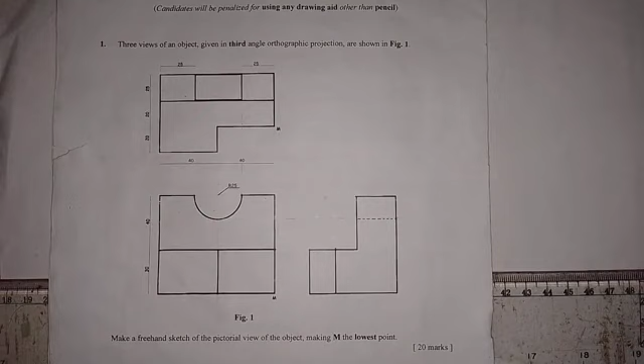Three views of an object given in third angle orthographic projection are shown in figure 1. So these are the views, as we have been told that these views are given in third angle projection. It means that this is the plan or top view, and this is the front elevation, while this is the end elevation. So we want to put this part together to obtain its isometric view. That is what we want to do.

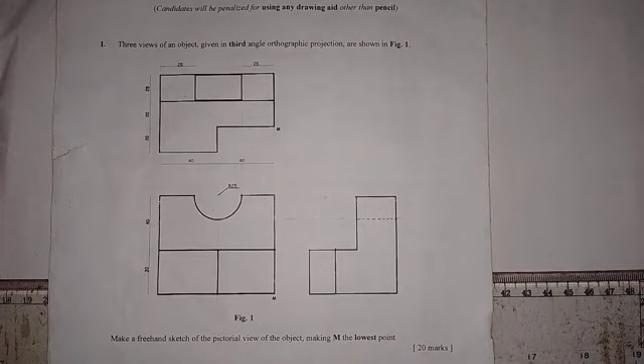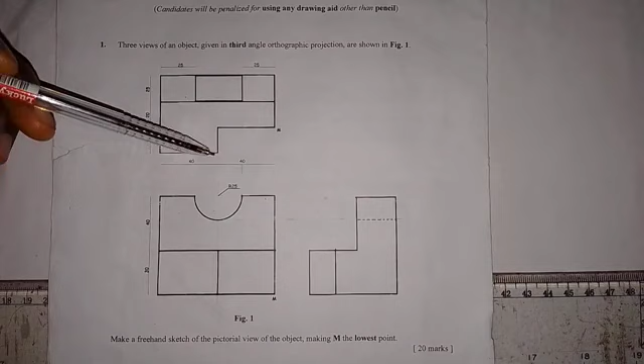Okay, let me talk about the dimensions on the object as we have here in the plan. For this square, we have length from here to here to be 25, and from here to here is also 25, and distance from here to here is 25. From here to here is 20, while from here to here also is 20, and distance from here to here is 40, from here to here is also 40. That is for the plan.

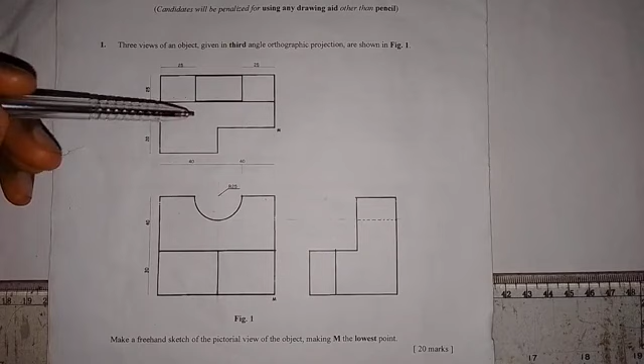Then coming to the front elevation, we have that distance from here to here is 40 millimeters, from here to here is 30, and the radius of this semicircle is 25. Those are the dimensions that we have here. Another thing is that we are asked to place this particular point M as the lowest point. So we want to put this part together to obtain its isometric view. Let's go.

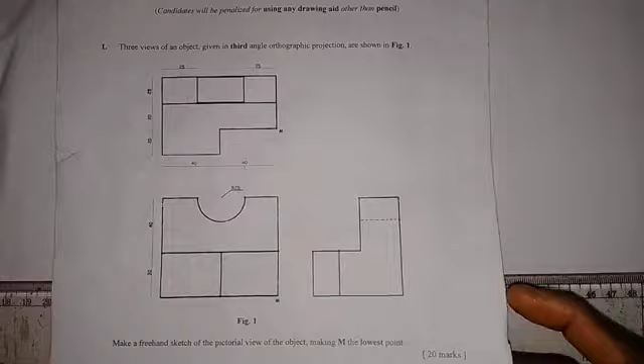Since point M is the lowest point, we need to draw a horizontal line. Then with our 30-degree set square, we draw a line in this direction, and then we draw a line in this direction, like this. Now this is point M, the lowest point, so it's very important that we indicate it.

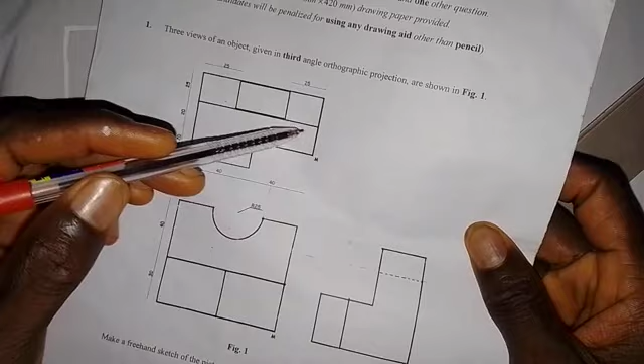The next thing we are going to do is construct this shape. I will just bring this out in the plan. We are going to see how I'm going to do it. For point M to be here, distance from here to here is 40. So I will take a measurement of 40 millimeters from here. So this is 40.

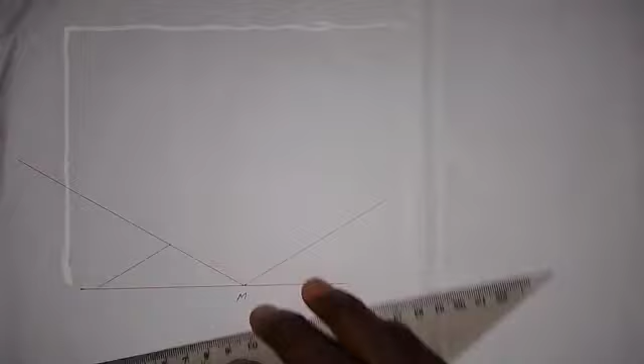So I'm going to draw a line from this point in this direction like this. Then from this point, we have that distance from here to here is 20 millimeters. So I will come onto this line and take a measurement of 20 millimeters. So this is 20 millimeters. I'm going to draw a line from this point in this direction,

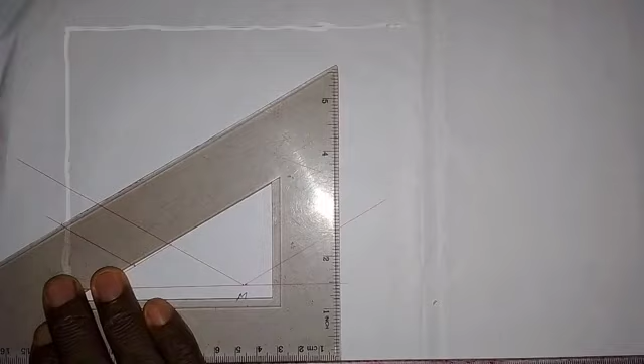like this. Also, we have that distance from here to here is 40 millimeters, so I will also take a measurement of 40 millimeters here. So this is 40. I'm going to draw this line in this direction.

The next thing I'm going to do: from here to here is 20, from here to here is 25, so that is 45 millimeters. So I will come onto this line and take a measurement of 45 millimeters. First I take 20, then I will add 25 to it, so this is it. I'm going to draw a line from this point. Though I don't need this line, I'll just draw it. Then I will also draw a line from this point here.

Okay, now looking at what we have done, I'm going to draw a vertical line at this point. Also at this point I will draw a vertical line, and at this point here I will draw a vertical line. At this point also I will draw a vertical line. Here also, and at this point I will draw a vertical line like this.

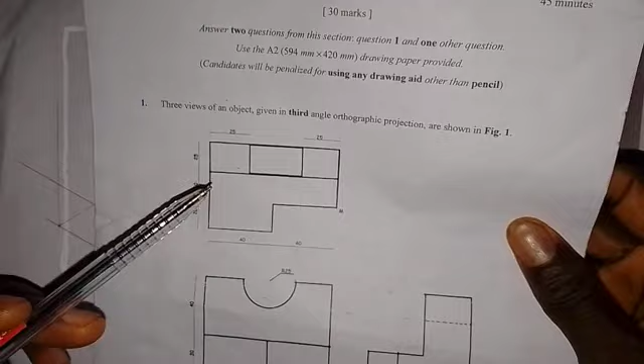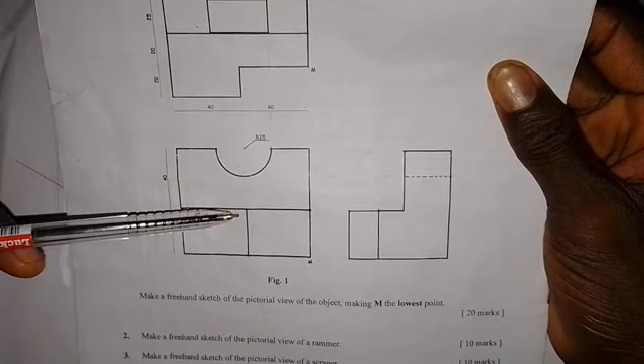Just try to look at what I want to do here. If you look at the plan, apart from this middle rectangle, which we don't need to put here, we have this rectangle and this shape in the plan. Now coming to the front elevation, we have this rectangle and we also have this rectangle. Distance from here to here is 40, from here to here is 40, and from here to here is 30. So let's bring out this shape in this drawing.

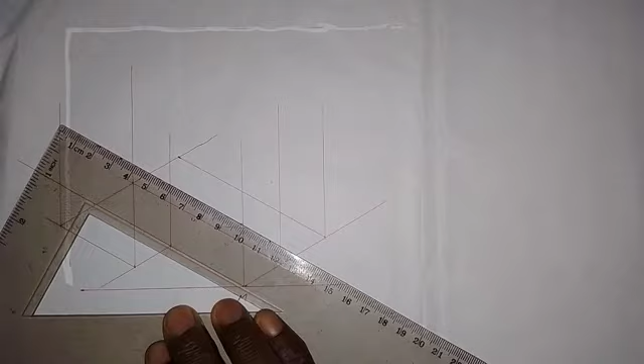What we need to do is take a measurement of 30 millimeters on this line. This measurement I just took once, so I don't need to repeat it on any other part of the drawing. Here now I will transfer this to this side, and this. Then I will also transfer this to this side.

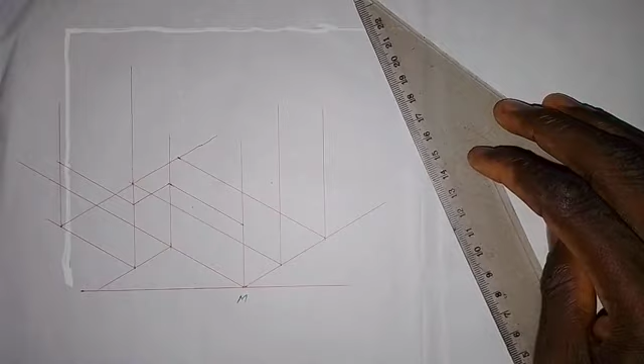Okay, so this is what we have here now. All right, so then this will also go. I may need to draw it, but I may not need. So this also goes to this side. Okay, so we have brought out that particular part, and again, I will need to take it to this side from here. So I need to transfer it to this side. Okay, let me draw it like that.

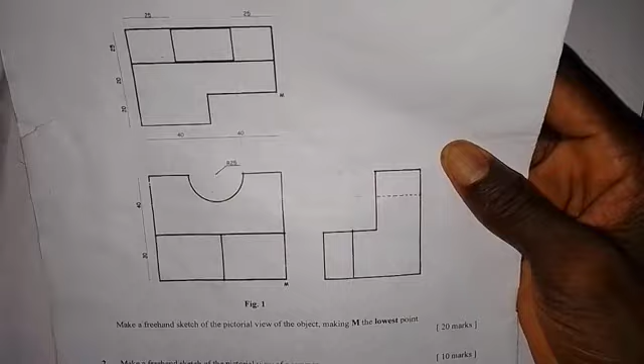Okay, so with what we have here now, the next thing that we are going to do, maybe I should just place, let me draw a vertical line at this point. Okay, so the next thing that we are going to do now is looking at this part on the front elevation, it is around here. So let's bring out the block first. Then later we'll draw this one in it.

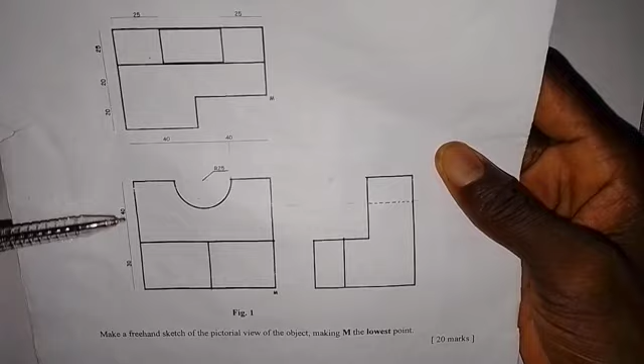Okay, so from here to here is 40 millimeters. We are going to take that 40 millimeters from this point here, because for this rectangle we have it starting from here to here. So we are going to start from this point, taking 40 millimeters up. So this is 10, 20, 30, 40. So we have 40 millimeters here.

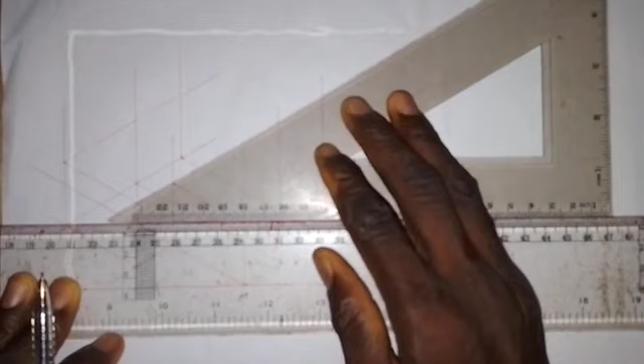So I will need to extend this line. I'm going to extend this line. Okay. Alright, so I will transfer this to this side. And this. Then I'm going to transfer this line. So I will need to extend this line. Okay, I need to extend it.

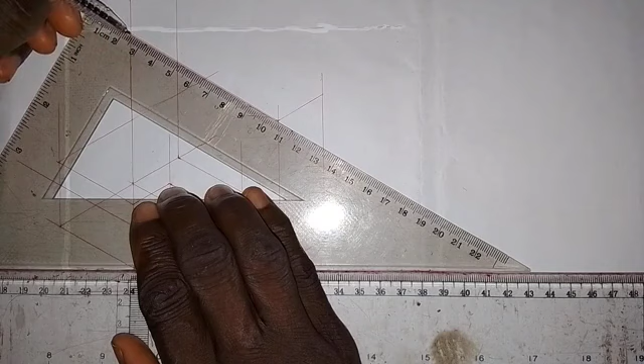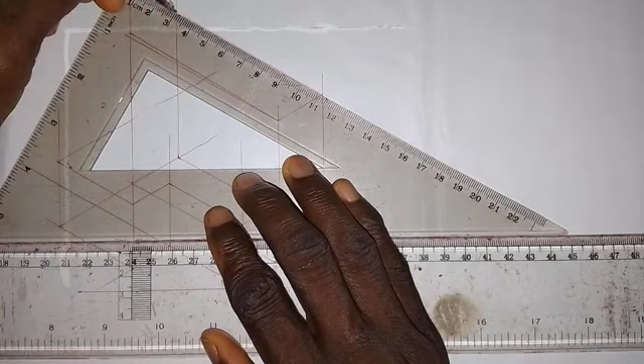Okay, so now I can transfer this onto this line like this. Then let me draw a line from here. This line is now okay. And the T-square affected it. Okay, so I'll come on to this point and draw like this. So for this one I can just join this together like this. Alright, so I believe you can see what we have there.

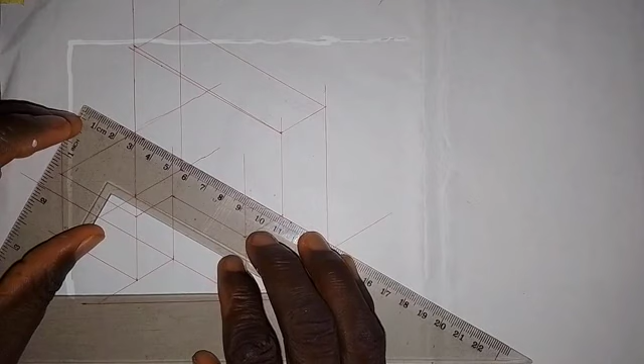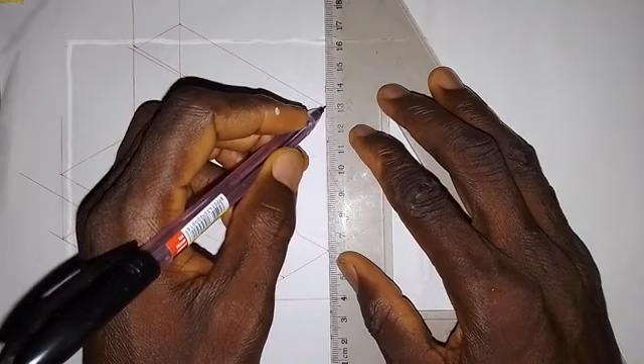So the next thing, before I continue, let's bring out the shape that we have obtained. And before we go on to that, I'm going to connect these 2 points together, and these 2 points, and as I said, we are going to make it a thick line at once like this. So you may think, okay, what is this one that we've done? By the time I bring out the outlines, you will understand that the work is almost done. Okay, so I'll pause the video and bring out the part that we have drawn already.

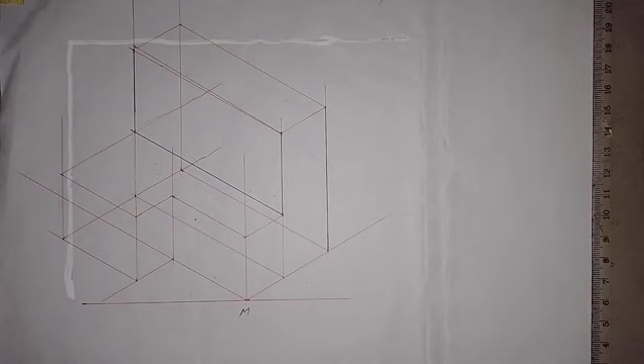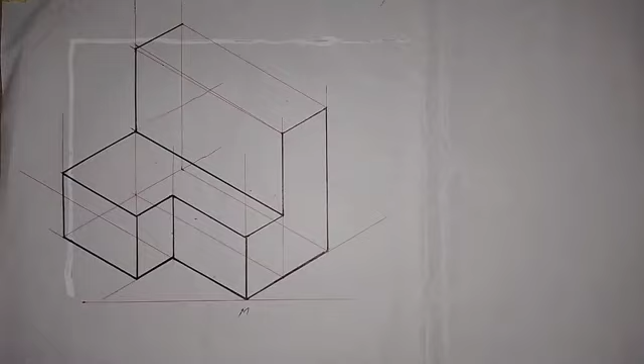And welcome back. This is what we have done so far. As I said, the work is almost done. So what we need to do now is to put the curve as we have here, to produce it on this part here. So we are going to divide this into 2. This is 80 millimeters, so we divide 80 into 2, that will give us 40. So we have 40 at this point.

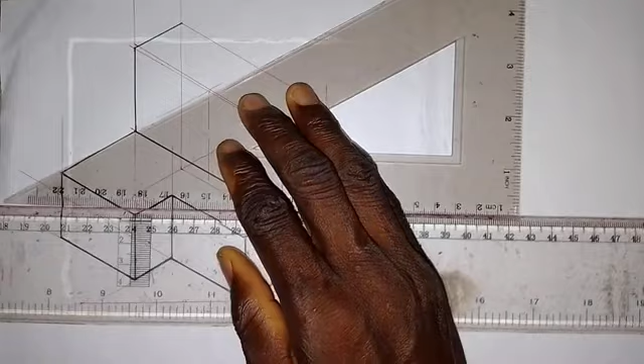So I'm going to draw a vertical center line on this line. Okay, then I'll draw a line in this direction. Okay, so I'm going to take a measurement from this point. As the radius is 25, I take 25 millimeters to this side.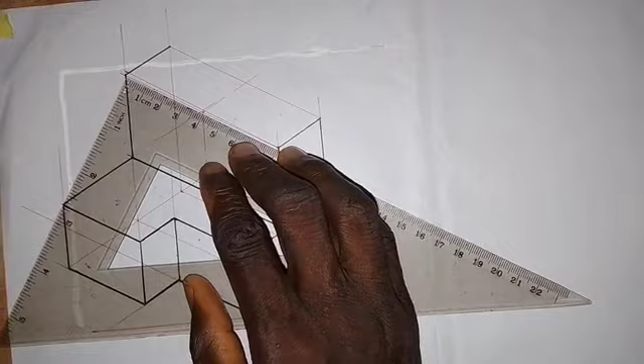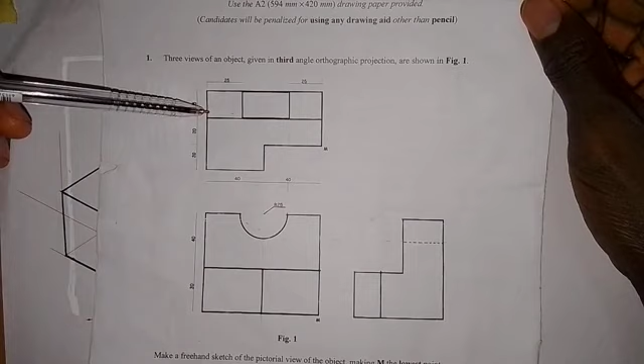Alright, I discovered something in this question. If the distance from here to here is 25, and from here to here is 25, and the total length here is 80, 40 plus 40, then 25 plus 25 will give us 50. So it means that the distance from here to here will be 30 millimeters. 30 plus 50 is 80, as we have from here to here.

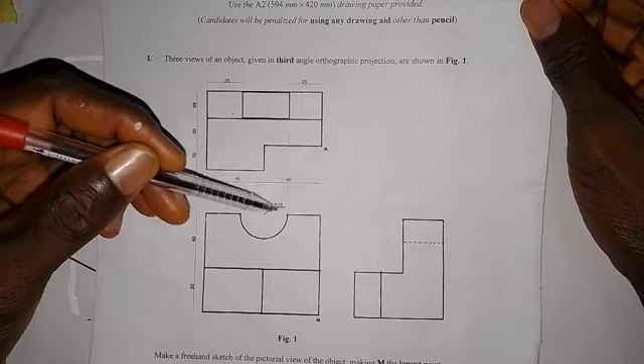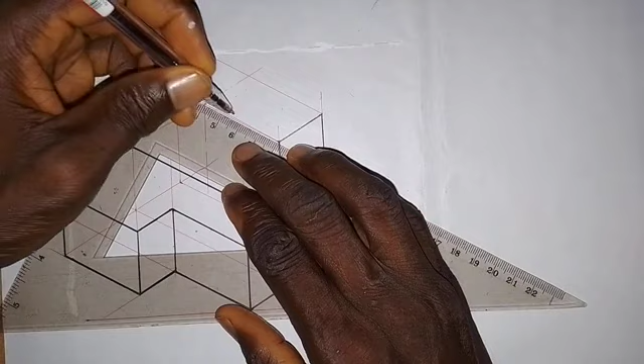So there is an error in this question: this radius of 25 is not correct. The radius should be 15 millimeters. This is a standard examination question, so there's an error on the part of the person that set it. So I'm making it 15 millimeters. So this is 15 millimeters from this point, and I will also take 15 to this side.

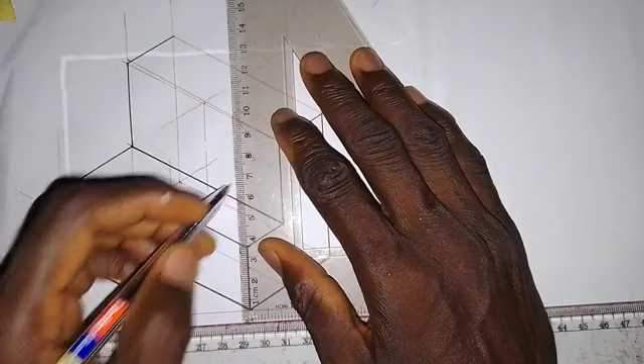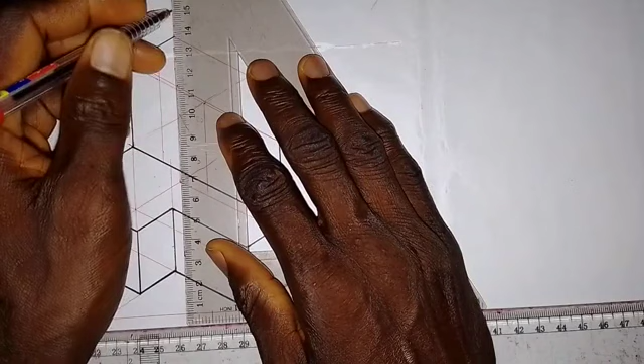So I'm going to draw a vertical line at this point. Okay, also at this point I will draw a vertical line. I should have taken it up. Sorry, so this is the point. We have that 15. Okay, so then I will transfer it to this side.

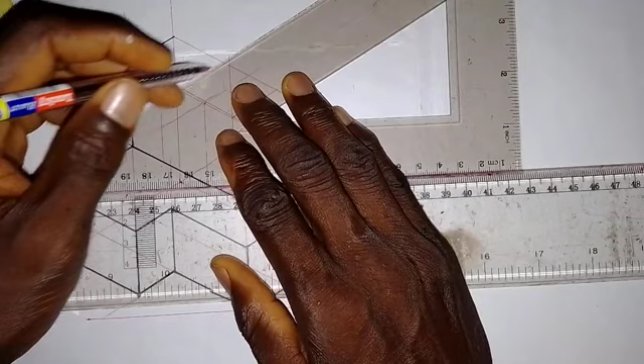Okay, so at this point I'm going to draw a vertical line. And here also I will draw a vertical line. So I'm going to take a measurement of 15 millimeters coming to this side here, 15 millimeters up. You should have watched a video where I produce a curve like this. I'm going to do it while I pause the video, then when I'm done, I will come back.

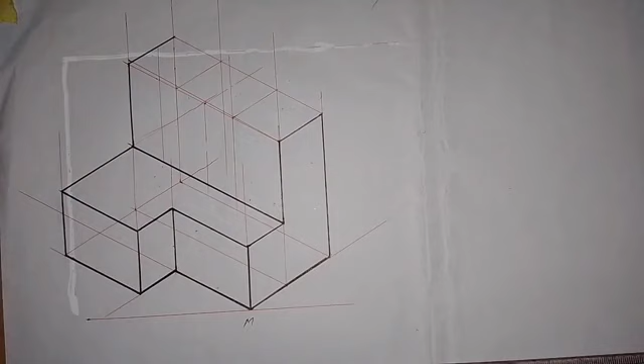Alright, this is how the curve will look on the object. If you have seen the video where I constructed an isometric circle or something like this, this is something that you should be able to do. Just watch the video on how I did it there, then you can do it here too.